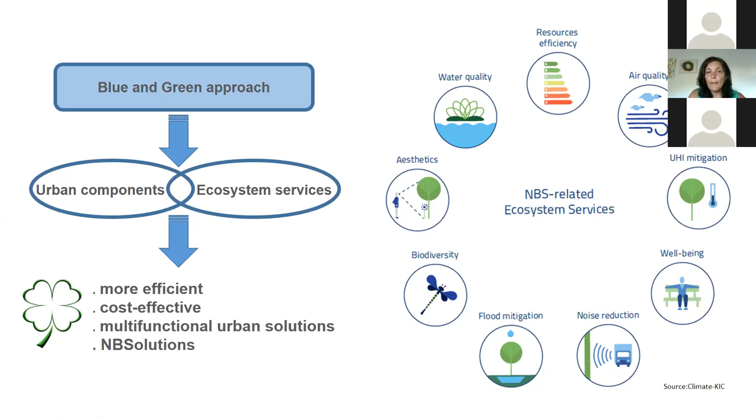And as I said, it's not only plants and aesthetics. It's not only biodiversity, it's also water quality, air quality, efficiency of using the resources. One of the big things in the urban context, for example, is reducing the urban heat island, noise reduction, flood mitigation. That's what I'll talk about today as well. So it's trying to incorporate plants in a way that we get services for free from the ecosystem.

And if you're looking into a constructed environment, we're talking about more natural things like city parks or a woodland, but also green roofs on top of buildings. And it's not to look nice, because mostly you don't see them if they're just doing their technical services. We're talking about wastewater treatment. Maybe we don't see any here, but these drainage ponds that you put at the soil level are also doing water purification, even the roofs on top. It's green walls. So there are different solutions.

Some are easier to implement and less costly. The other ones, of course, are an investment in nature; you have to invest in them to get your rewards. But these are the so-called blue and green solutions, especially in urban environments. We'll see in the example, but one of the problems we're facing is impermeable urban environments, so the water cannot go through. And that's why we're talking about flood retention.

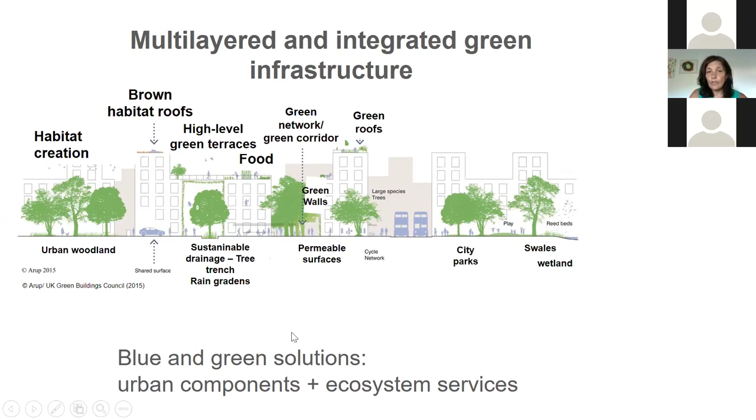And these greenery services can help a lot. So I'll just go to two case studies that we've implemented at our university. If you wish, and if it's allowed for me to say this, you can interrupt me through the conversation, because I was just looking at how we did things.

The first one is an example on constructed wetlands for wastewater. This is not only for wastewater treatment, it's also for water runoff treatment, things like from roads. And lately it's also looked at for buffer zones from agricultural production areas. So you get very much a diffuse pollution through agriculture, leaching of nutrients and sometimes organic compounds that are pollutants. And what you can have is buffer zones that are a barrier between the agricultural zone and the water resources that are most of the times nearby these big

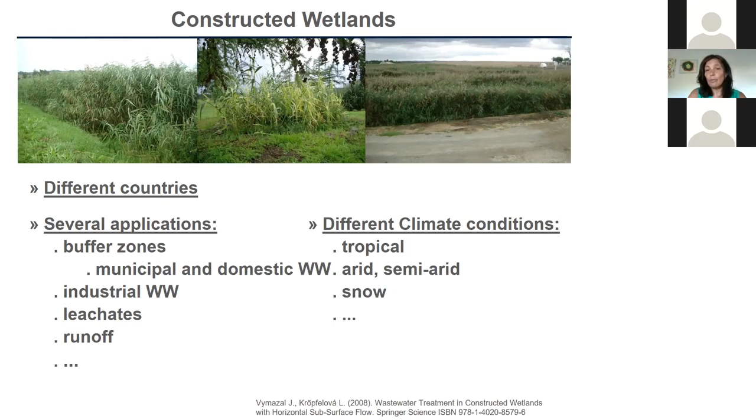This can be used in different countries, and as I said, it has several applications: buffer zones, municipal and domestic wastewater, industrial wastewater, runoff, leachates. They have been used everywhere, and maybe if you don't want to say anything now, you can let me know in the end if you know them or if you have them installed in your own countries. We've got about 4,000 in Portugal. Not much for the type of climate we have. They are more prone to be more efficient in warmer climates. They're more used in the Nordic countries, actually. They work when it's snowing, although slower, because the microbial activity goes on anyway underneath.

So they are probably the less technological or the less costly solution for wastewater treatment in terms of construction, operation, maintenance. They are very tolerant to flow fluctuations, which happens many times. If you have a wastewater treatment in your own city, one of the issues for it to be operating well is that you always get to receive the same flow. So you have to have equalization tanks. But they tolerate that. They integrate well into the landscape, and they have multiple functions because they allow for these ecosystem services, including biodiversity and purification of the water. I put here ornamental features because the example I'll be giving has to do with this.

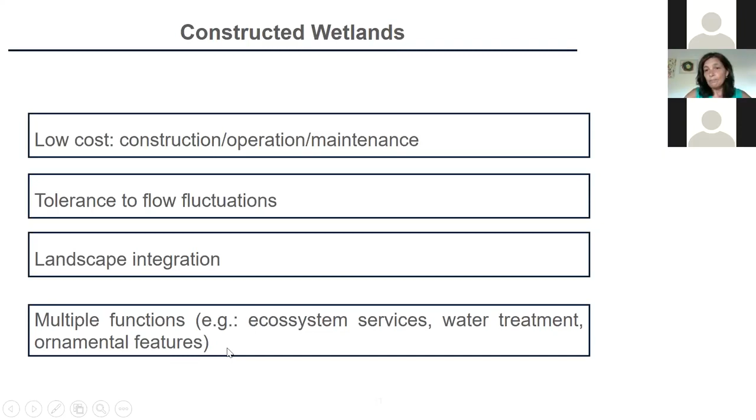Of course, there is a big drawback that I should have here. They take space. So it's the biggest thing. You really need space to put this. But you can use it just as a scheme. You can use it to treat the water. For those who ever heard about the secondary treatment, this is just the main biological treatment of a wastewater treatment plant. You can use the constructed wetland to treat the flow, or you can use it after the main treatment, just as a polishing step to take the rest of the nutrients. And you're growing the plants on it, so you are doing biomass production, contributing to carbon sequestration and to further uses of the biomass.

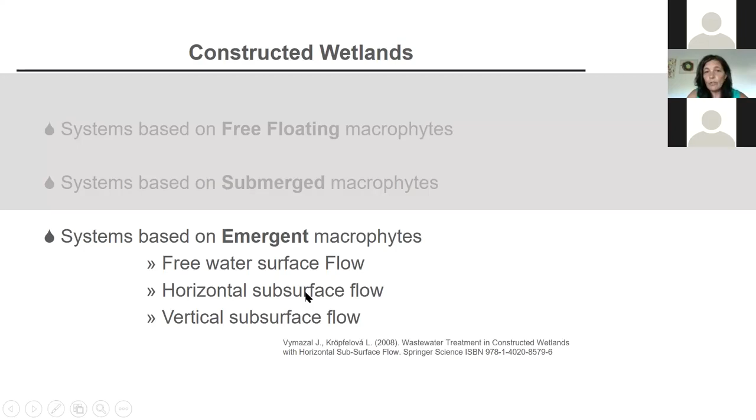You just have a compartment or a tank where you have a substrate. Many times this is like expanded clay. These are the things that you use for gardening that support plant growth. It could be sand, you can use stones. Basically, you use what you have available, as long as it supports plant growth and allows a good drainage of the water. So the water goes in, comes out, and while passing through the rhizosphere of these plants, the organic matter is degraded. Some of it is taken up by plants.

So you're actually sequestering nitrogen and phosphorus in the biomass of the plants, which you can use further for composting, ornamental purposes, or energy. But you're also giving a niche for biodiversity while you're treating the water.

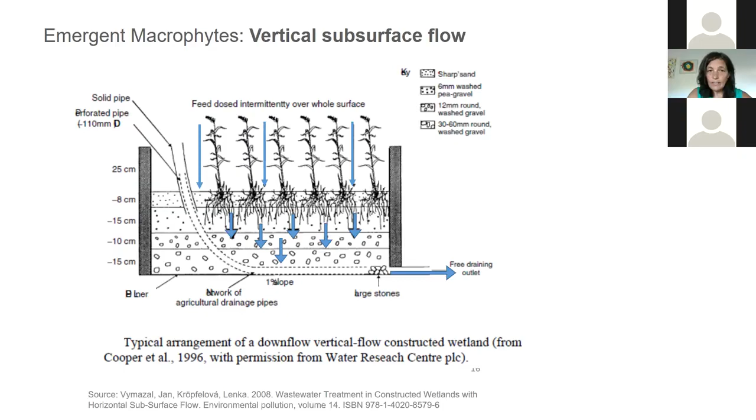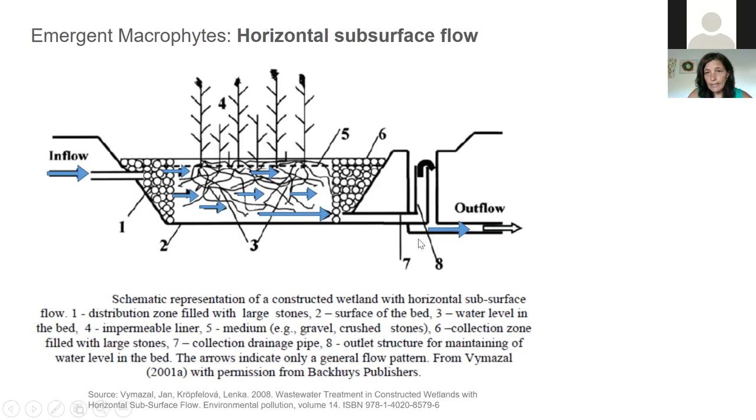There is nothing else here - not much in terms of technological compartments, no pumps mostly. The water just flows. That's why it's so low cost and less energy demanding. And of course, this is not just a hole - you must have an impermeable layer.

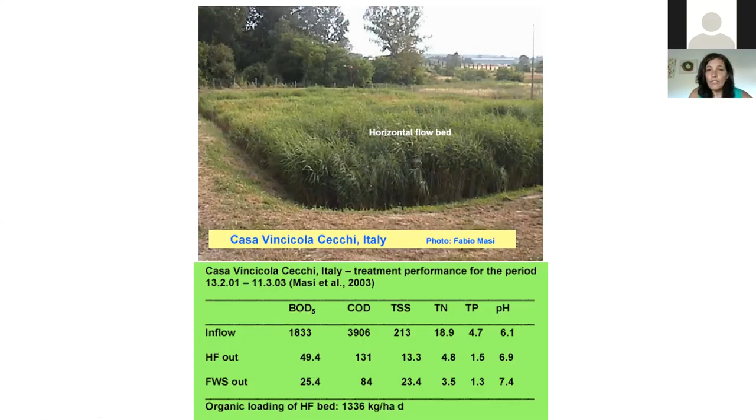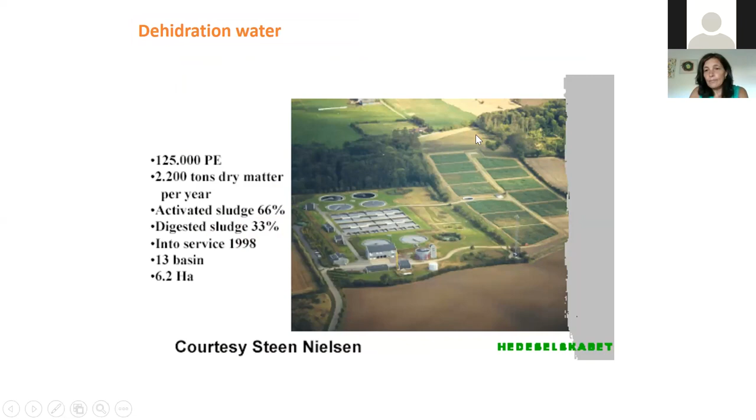Okay, this is just another one - a constructed wetland in Denmark used to treat the water that comes from drying the sludge of the main wastewater treatment. The reason I think this is a nice picture is that it shows you do need space - it takes a lot of space if you're talking about big quantities.

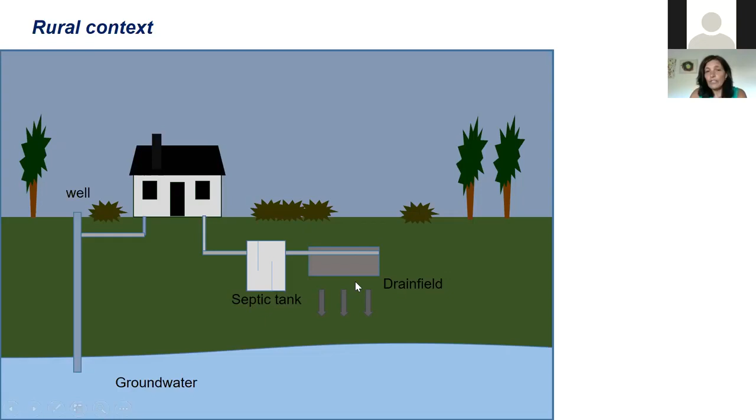In this context, usually you have to drain the septic tank once in a while. Instead, you can have a constructed wetland to treat the water. So this is where we put it - this is the house. We've worked many years in wastewater treatment with constructed wetlands for industry, and this was our first example for domestic wastewater.

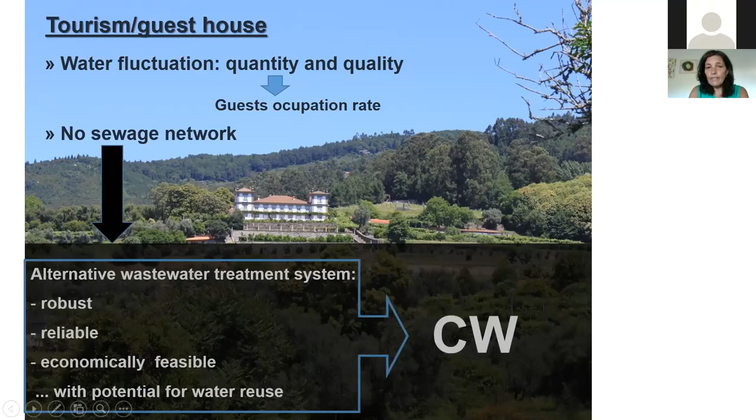They produce vineyards here - you'll see in another picture. We also tried another constructed wetland for the water from the vineyards, and that constructed wetland was put here. There was no sewage network, so this was the alternative wastewater treatment they saw as feasible to implement here. So this is the place.

It's not too big, about 40 square meters, and the water is produced in the house. The reason to show this is that there are no pumps - the water comes down to the septic tank by gravity. So the constructed wetland is here, the house is here - this is the dimension. This is all the farm, these are the vineyards, and this is where we put it.

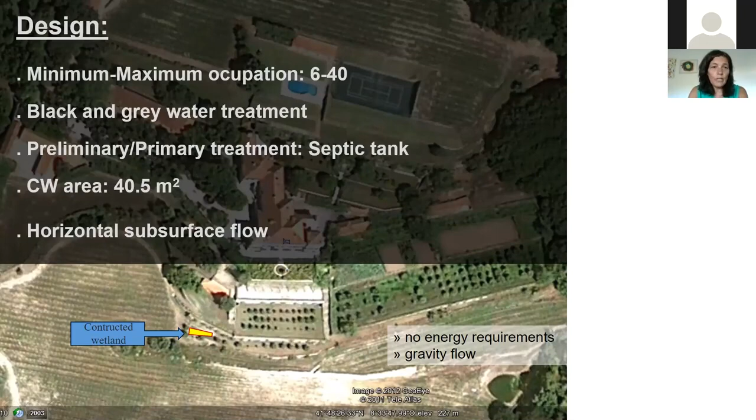So no energy is needed, everything comes through gravity. The house can accommodate between 6 and 40 people. As I said, this system tolerates differences in flow, and we use it for domestic wastewater coming from all facilities - the black water from toilets, and the gray water from washing clothes and cooking, everything. So this was the type we decided on: horizontal flow.

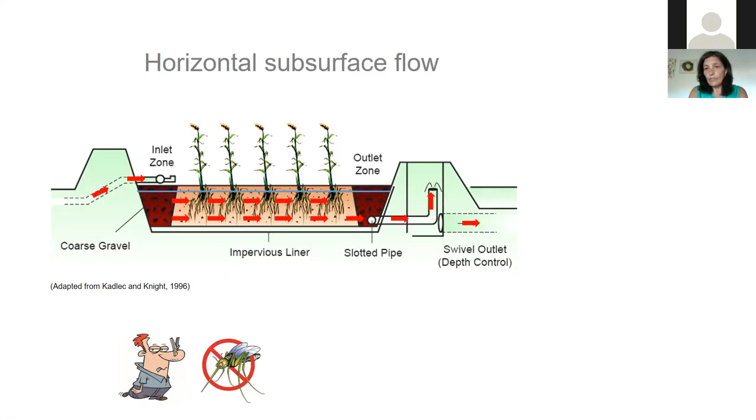One of the issues is usually the insects and mosquitoes, and you have to construct your wetland so that the water level is not at the top. If you have water on the surface, larvae can proliferate, and then you get insects and odors. This is a tourism house; we've had this running for 10 years, and tourists are there. There's no smell, and there are no insects.

We decided, because this was a farm with domestic wastewater, to use the ornamental plants they had around. So we did not go for the Phragmites you've just seen, which are very tolerant to pollution. We tried the different plants that they had in the house. I have to say we tried all the plants, but not all were able to stand the organic load.

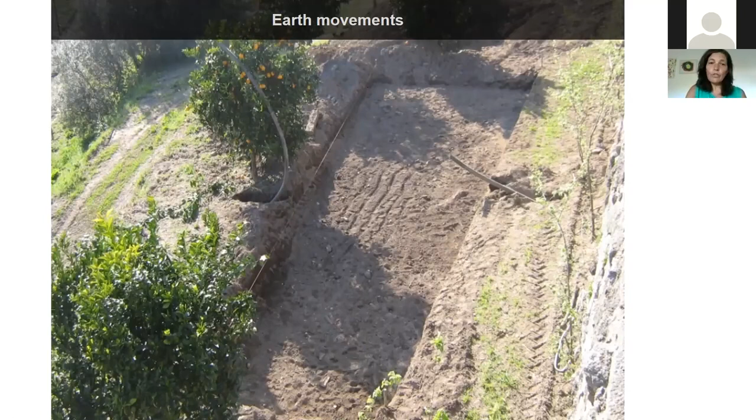We decided on the place. You start by digging a hole, usually about 50 centimeters deep, 50 to 75. It's not much used to do it at a bigger depth, because what you want is to get the roots, and water through the roots where the microbial activity is higher. So there's no point in doing it very deep—you don't want dead zones.

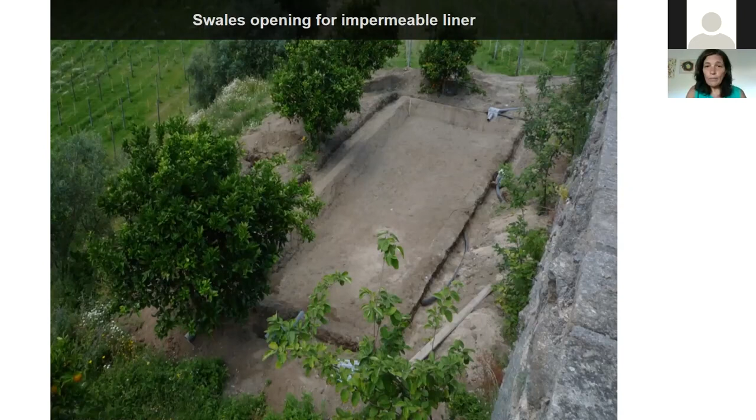Then you prepare for the impermeabilization. It's most of the times the most costly thing, depending on the country you are in. So we got a kind of professional impermeabilization of the wetland with a geomembrane and geotextile.

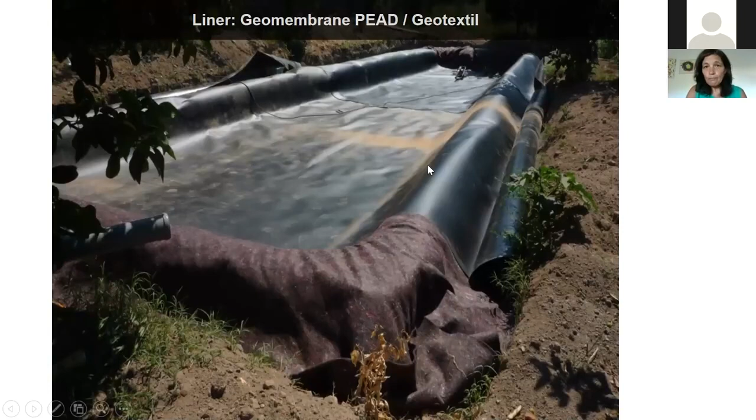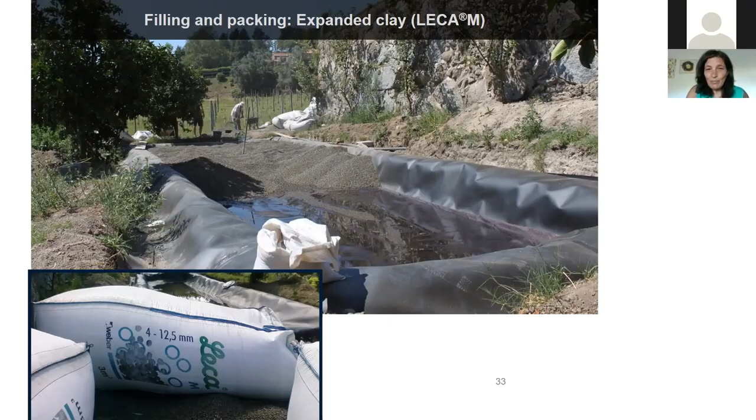Then in this particular one, we decided on expanded clay with a certain granulometry. We've used this expanded clay for a long time in constructed wetlands, and we mixed it with sand. Sometimes it's more costly to have the sand if you have to get it from a distant place. Then it's prepared, so you just have to plant.

And of course, there are the tubings going through to move the water. This is the place that goes in—the word is missing in English—but this is the entrance of the wastewater. It comes underneath from the septic tank.

Planting is always something where everything looks bad at first. So we use, as I said, a mixture of plants. We had to plant in summer, and we had some delays with people coming through to do the work for the filling and the impermeabilization. So that summer was like 40 degrees, and I thought this was going to be a disaster. But then plants start appearing.

We connected the wastewater treatment plant. This seems a different wastewater treatment plant, but it is exactly the same one—it's just because we use polyculture. Depending on the time of the year, you get different colors. You see here a mixture of the plants. This is the same plant; it really depends on when you take the picture—you get it yellow or red.

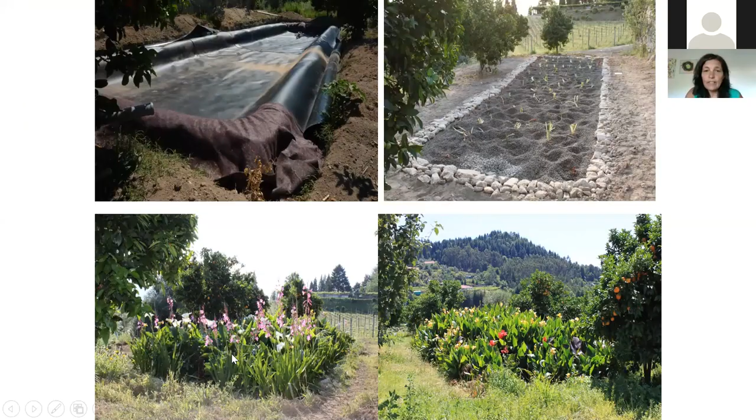The plants grow a lot, actually, because they are getting organic nutrients through the wastewater. This is just one side by side, so you can see it is the same, but at different times of the year. They grow so much you can see someone here, and you can walk through that. As I said, we leave the water at just a few centimeters underneath, with some slope so you keep it at a certain level, but they grow a lot.

We cut it once or twice a year, and then this biomass, in this case, goes for composting. During the year, the plants are used by the house just as ornamental plants. You see the vineyards here, that's where they produce the wine. And we have a model, one that we haven't studied so much here, to collect the water from the vineyard, from the wine production during September and October when they produce.

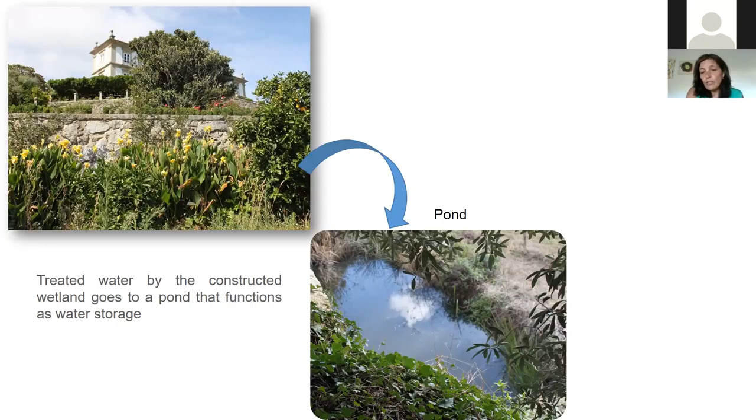You need space, but it's a solution for many situations where you don't need to spend so much energy, and where you can treat water, because in many places the only alternative is that the water simply isn't treated at all.

The pond allows better conditions for this circular economy. That's why we do it. Now, just very briefly, the second case is the green roofs.

Green roofs are also a nature-based solution that is very good for urban contexts, and a way of promoting the reuse of non-potable water. People don't only put this solution to treat wastewater on top of houses; they also put it to harvest rainwater.

It's not only about using water. If it rains, there's a lot we can do. About 50% of the water we use in our houses, as I showed last time, can be replaced by non-potable water. So we could save a lot of the water that comes through our tap, keeping it for drinking instead of for these other functions.

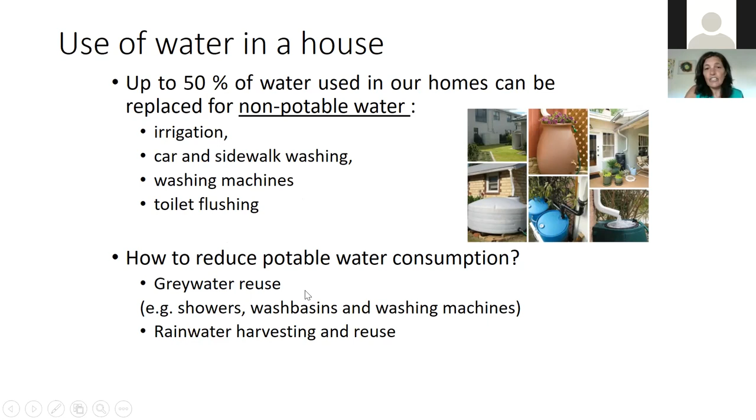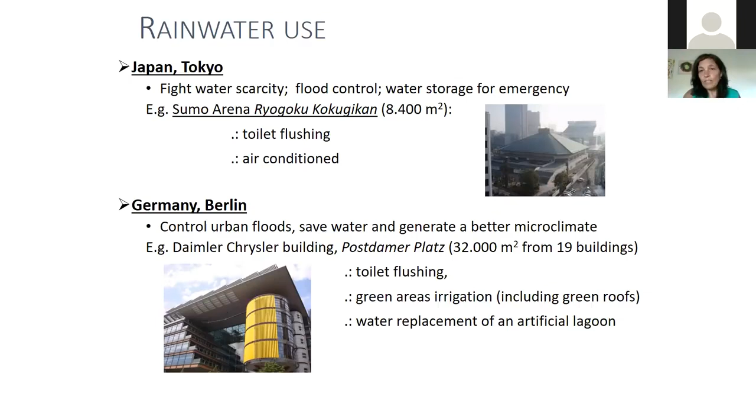So in some parts of the world it's for water scarcity, but in other parts where it rains a lot, the main use is to control floods, especially urban floods in highly paved settings. Berlin, if you look it up, is known as the sponge city because of all the greenery around it. The main purpose is that when it rains a lot, you can store the water for other purposes, but you delay the runoff, so you avoid flooding.

This is becoming very important, especially because the urban world population is growing at a much higher pace than what is happening in rural areas, which are actually steady in terms of numbers.

So the green roofs—if you read the news, in many places of the world they've become compulsory for new buildings of certain dimensions, especially municipal buildings. You must have either green roofs or solar panels, so you must have solutions to decrease your energy input or your energy use.

Green roofs have a lot to do with energy, because in a house or a building with a green roof, your energy savings can be really big if it's well implemented, because you don't have to heat so much during winter and you save on air conditioning during summer, since they insulate the house.

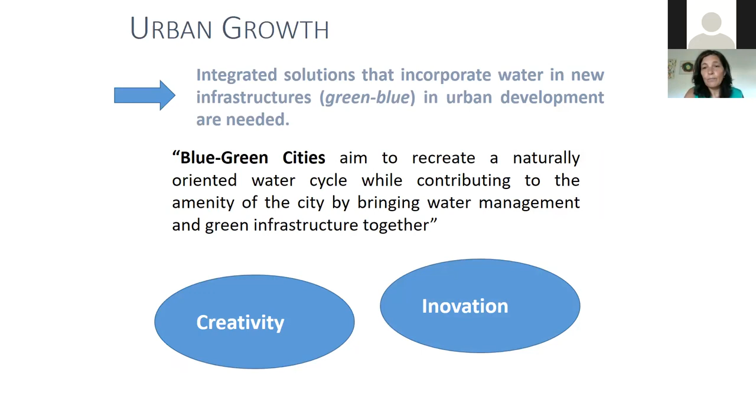So this is really a multi-purpose construction.

If you look at the origin, you're actually building them because of the problem of highly impermeable cities, where if it rains, the water has nowhere to go. If there are impervious surfaces, you get runoff water on top of your city, but if you have soil and vegetation, the runoff that stays on top is much less—the rest is infiltrated. What's happening in our urban areas, like Porto for example, is that most of it is impermeabilized, so you get an impervious surface and you get floods.

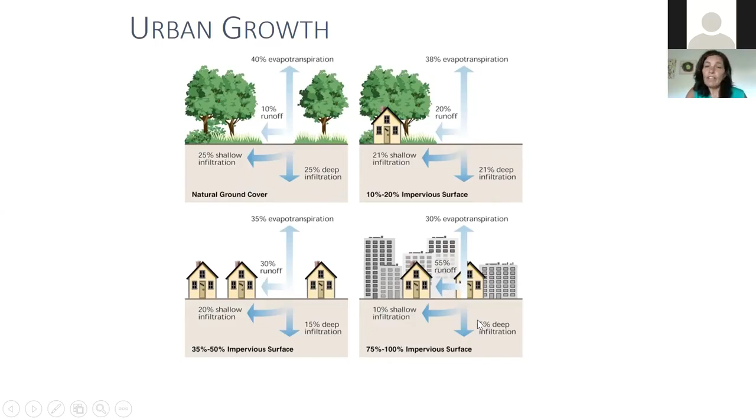So these green roofs have all these multi-purpose functions: rainwater management.

They can remove air pollutants. They increase biodiversity, as you've seen for the constructed wetlands, and they decrease the energy consumption. This has been studied now. They increase the lifetime of the roofing materials.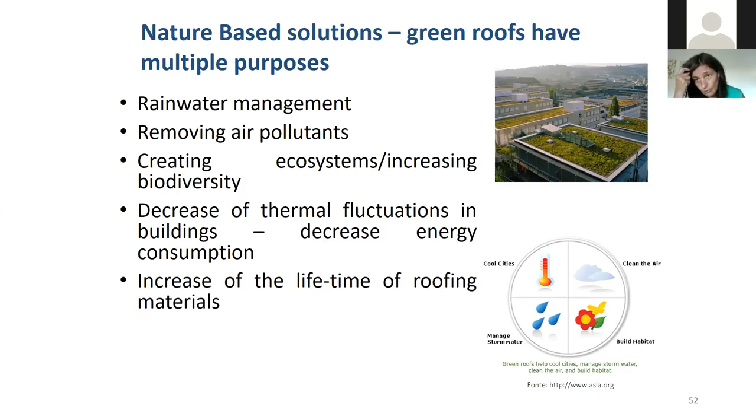Many of us go through cities with lots of green roofs, but we don't see them because they are on top. Again, they are a nature-based solution because they mimic completely what happens in nature. They mimic the natural soil layers.

If you hear about a green roof, it's not just a pot with plants. It's a set of technical layers where you have filters, so the roots do not come through and you don't dirty your water. Then you have the drainage layers. This is also very technical, where you are actually storing the water and you can reuse it. Then you have to have this link to other infrastructures. You have a protection layer for the building, and then a waterproofing.

So it's not just putting plants on top of a building. If it's not a new building, it really needs a careful look, because you just can't put too much weight on top of the roof, and you must make sure that you're not going to inundate your building and get water coming into it. But if you look here at a soil layer, it looks like just what happens in nature.

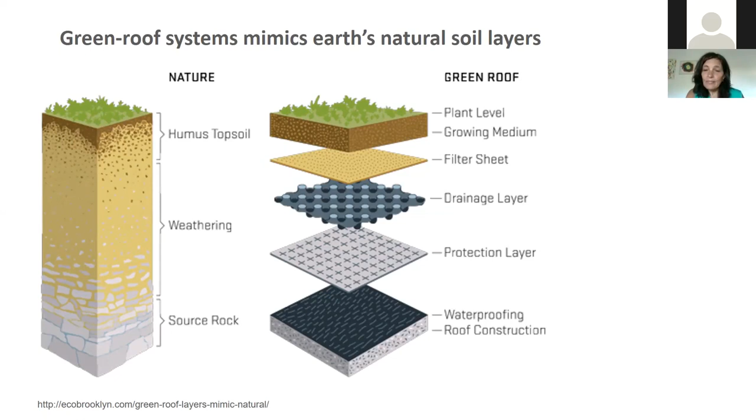And this has been used now much more intensively these days everywhere. The word intensive was not to do with the 'intensive' that is written here. You can find different types of green roofs, going from intensive to extensive. Here, intensive means that it needs maintenance. So it depends on the purpose.

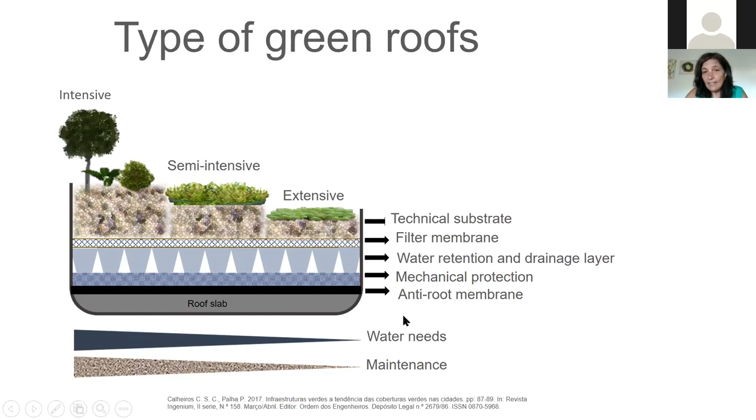If you want a green roof where people can go and walk and see trees, and it's a zone for recreation, then you're talking about roofs with higher depth and more intensive in terms of maintenance and installation. Then you have the semi-intensive, already a lower depth, and then what we call the extensive ones. The example I'll give is extensive. They're just there to serve the purposes of keeping water and the other services we talked about, not for people to walk through or be there. But all of them must have all the layers I talked about.

If you look at some figures, stormwater volumes and flooding can be reduced by 85%. So it is really, really a lot. Of course, this is just a drawing. You can have this type, but it takes much more in terms of installation, operation, and maintenance.

They do exist, and people are looking very much at these solutions in health buildings, hospitals, for people to get better with nature, not just being in buildings for technical health solutions.

So in this picture you see it very well. If you have a peak of rainfall in a conventional roof, you have the water coming through immediately, a very big peak. With a green roof, you delay it. It does not mean water is not going to come through, of course it will, but through time and with lower peaks. That is what is called flood retention and delay of the peak. I would say that for many places in the world, that's why they're used, to control floods.

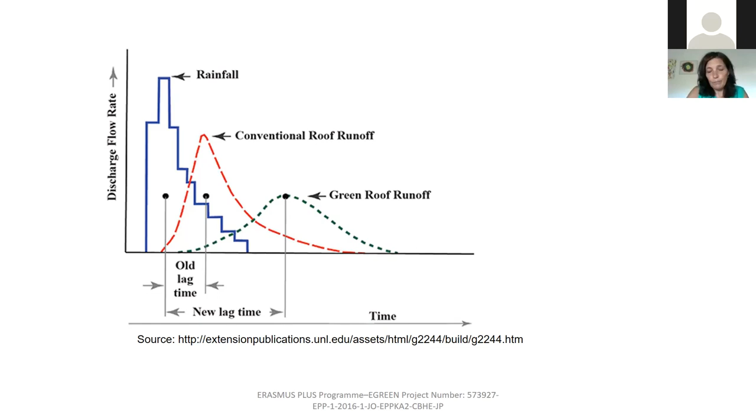Sometimes they don't even take the water into the building or reuse it; that needs some other infrastructure. You can find more in the literature on percentages of water retention. This is a study of ours, and we got 30%. It was a very low depth of roof, 10 centimeters, but in other studies you can go higher, up to 90% water retention.

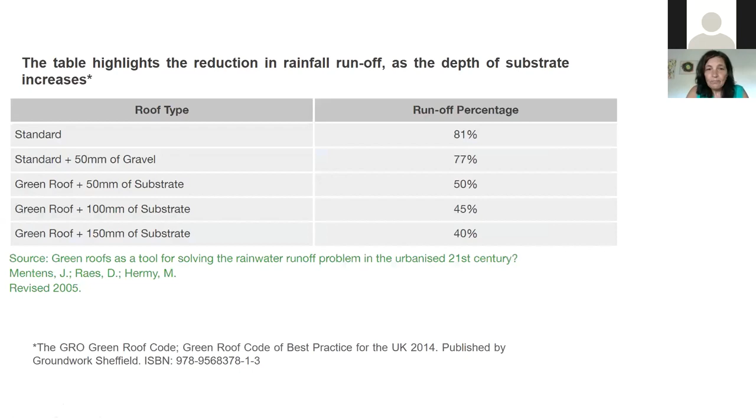So let me show some examples, because you don't get to see them normally. There is a prize for green roofs every year, where you can see the best pictures. You can go to a site and see which ones were the prize winners.

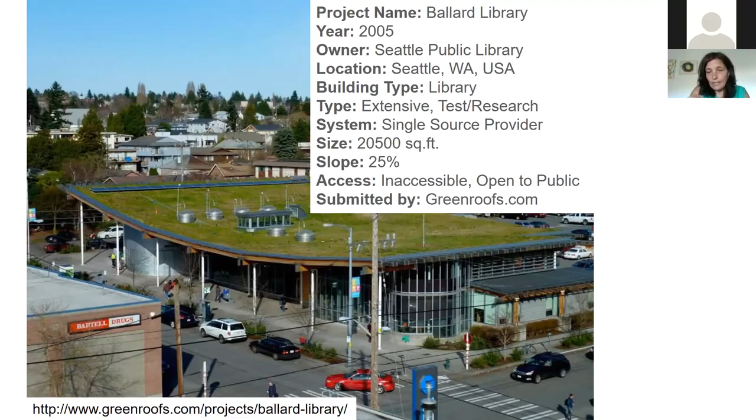We use green roofs to study different substrates, because at the moment, at least in Portugal, you only have 1 or 2 companies that do green roofs. The materials come from other countries, so it's very expensive. So we're looking at other materials that allow for low weight and plant growth, and in our case we only look at aromatic plants. There are native plants here that can survive the harsh conditions of rooftops, especially in winter.

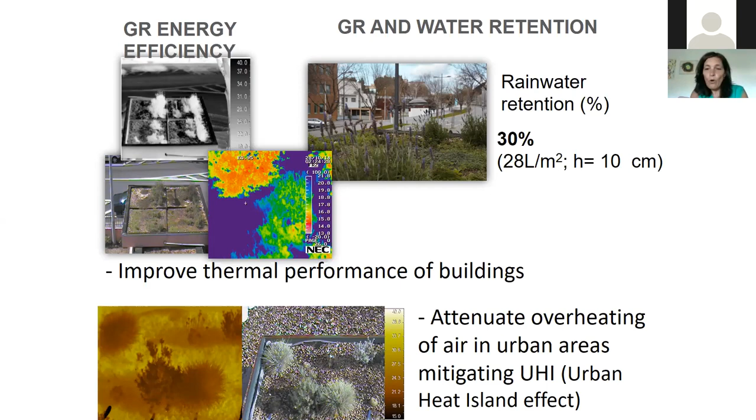We use expanded clay, eggshells, and some more available materials from our country - even what comes from the quercus, oak. We use what are the stoppers for wine, the natural stoppers - cork. We are the biggest producers of cork, so we also use cork because it helps with insulation, and if it's put in small pieces, it also allows for drainage of water.

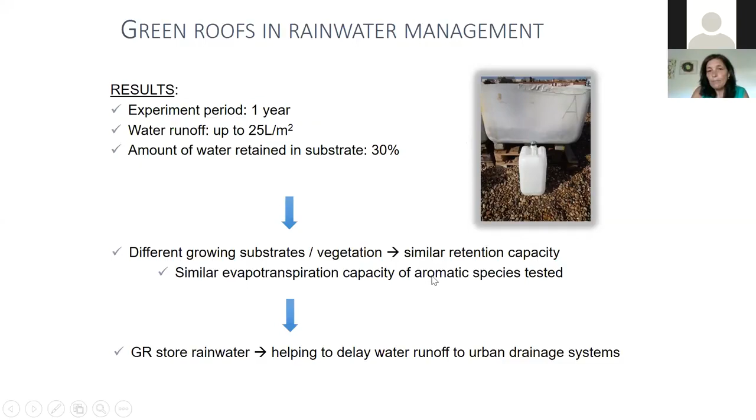So aromatic plants grow very well. We've had them for about 6 years at our university, and we did some experiments, not in these bigger settings, but in 1 cubic meter containers. This is very low tech - these are 1 cubic meter containers for chemicals that were washed and given to us, and we had an experimental setup for more than 1 year now. We're continuing for more years to allow us to calculate the runoff coefficient for water in our Mediterranean climate. So we got this into models.

We now have, out this year, a guide - it's in Portuguese because we used to follow the German guidelines, as they were the ones who had this really developed. So 'coberturas verdes' means green roofs - a technical guide for Portugal. Our pilot study at university used these 1 cubic meter containers in series with different plants, collecting water for 2 years. They incorporated our model equation into the modeling for green roofs in Portugal, which was quite nice.

This is also very good to involve students. Students are always helping through what we call our research club. Undergrad students, both first and second cycle, those that really like fieldwork, help in this kind of study, and then we give them recognition for that which they can take to their job interviews when they go out to work.

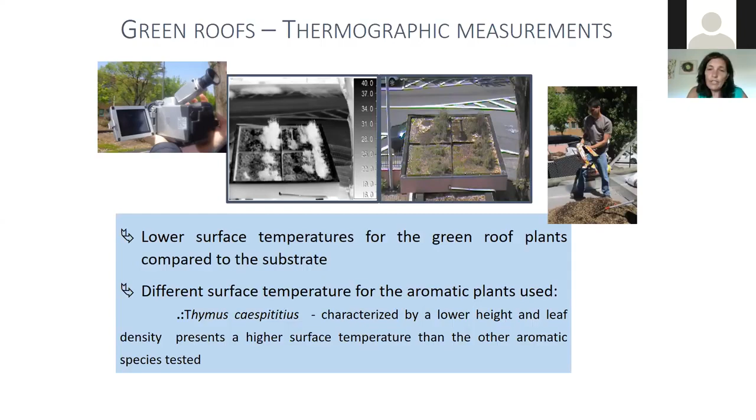So these are two of the nature-based solutions that we are using and doing research on. The green roofs are a much more recent one, maybe 8 to 9 years, while constructed wetlands - we've been working with since the 90s, so much more experience.

But we're trying to contribute to urban policies. If we can help, then it's a gain, because the way things are going, especially for people living in very densely populated urban areas, we have to do something about it. So this is a small contribution, but it's not only research - we use this a lot to get demonstration and awareness among the population in general.

With visits to the sites, to the tourism house, and teachers from secondary schools who can incorporate this into examples. People from schools - students - come to visit as well. So it's like an experimental model for different things, and we keep it, especially the constructed wetland, for this purpose. We're not publishing on constructed wetlands anymore - we just use it for demonstration purposes for different levels of society.